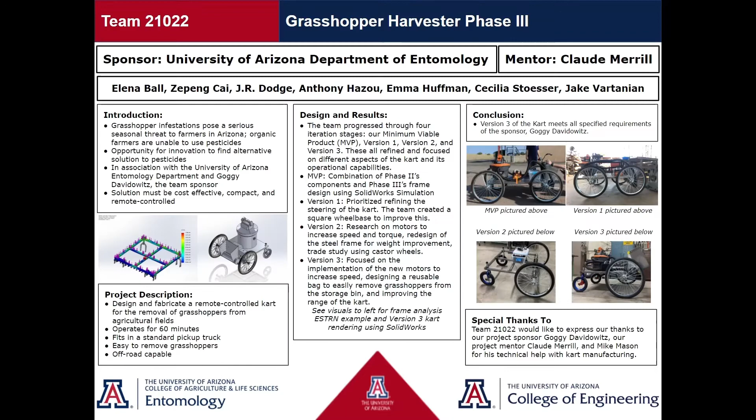Shown here is our Senior Design Day poster.

Farmers across Arizona are plagued by grasshopper infestations, which reduce yield and damage crops. Organic farmers are unable to use conventional pesticides, leading to an opportunity for innovation. The sponsor has requested a solution to remove grasshoppers from crop fields that is cost-efficient, remote-controlled, and relatively compact.

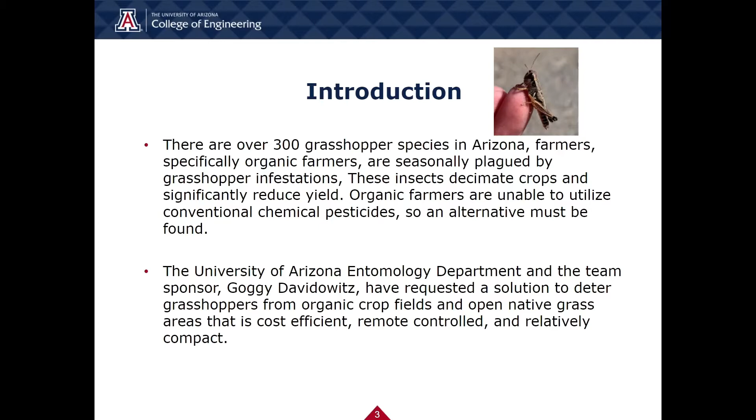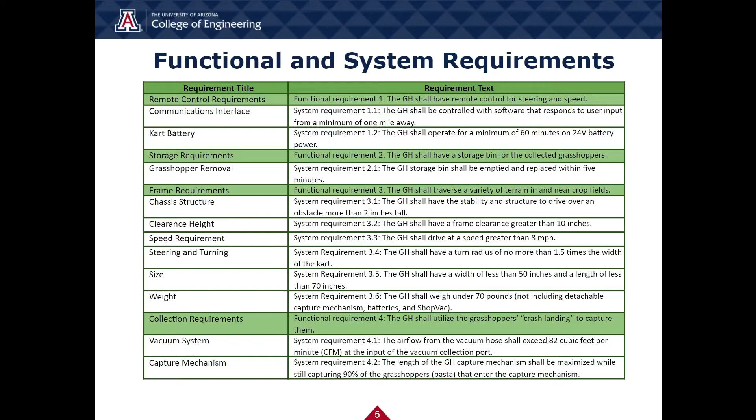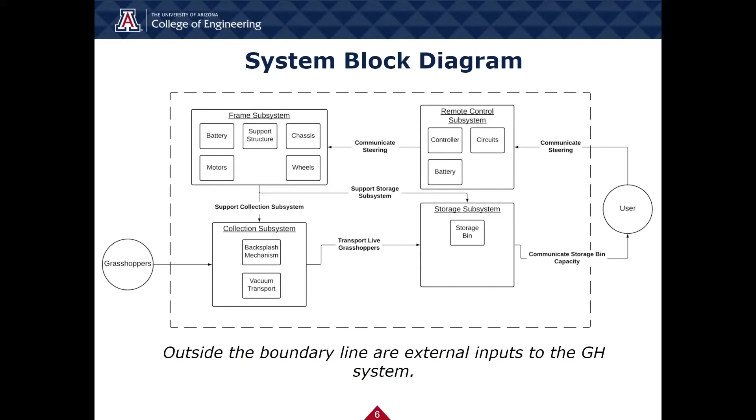The team follows Agile methodology, which includes sprints, for us defined as every 2 weeks. We meet together to discuss tasks that are achieved, not achieved, any impediments and improvements we can follow, and risks that have been incurred. The following tasks were prioritized by the sponsor's request.

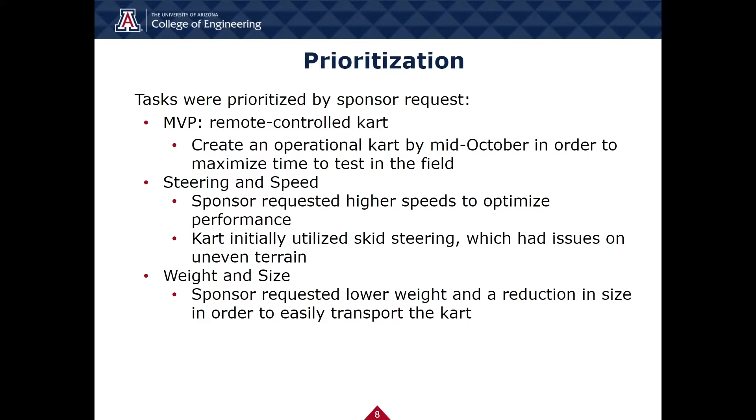First, an MVP, which was a remote-controlled kart that was delivered by mid-October. Second was steering and speed improvements. And third was a reduction in weight and size.

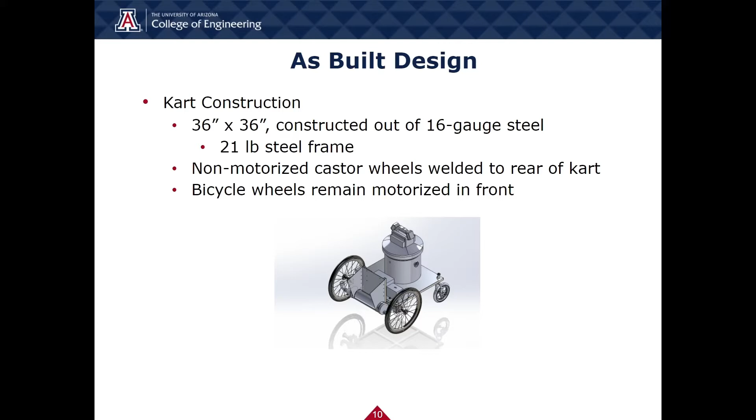The current design is a 36 by 36 inch frame constructed out of 16 gauge steel. The steel frame weighs approximately 21 pounds. There are 2 non-motorized caster wheels welded to the rear of the kart and 2 motorized bicycle wheels in the front of the cart. Shown here is the current cart design.

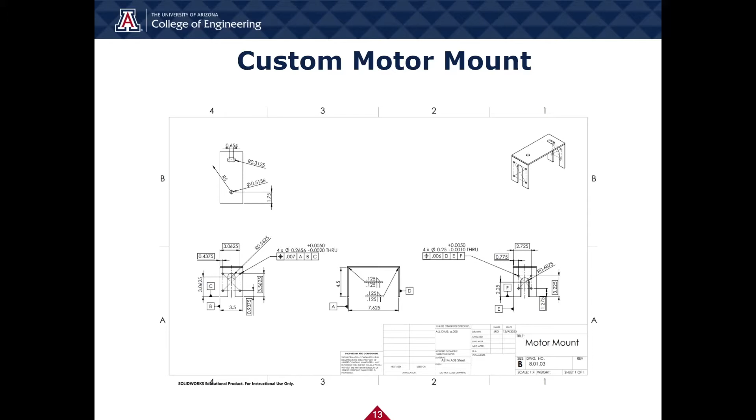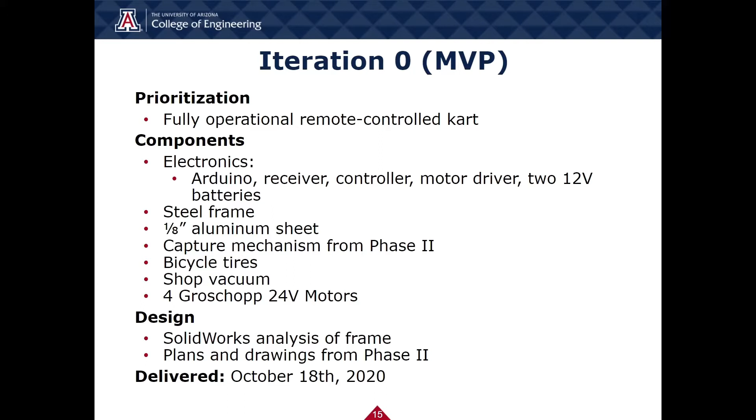The priority of Iteration 0, or MVP, was a fully operational remote-controlled kart. It was delivered on October 18th of 2020, and it utilized components from Phase 2, with the exception of newly purchased steel for the redesign of the frame.

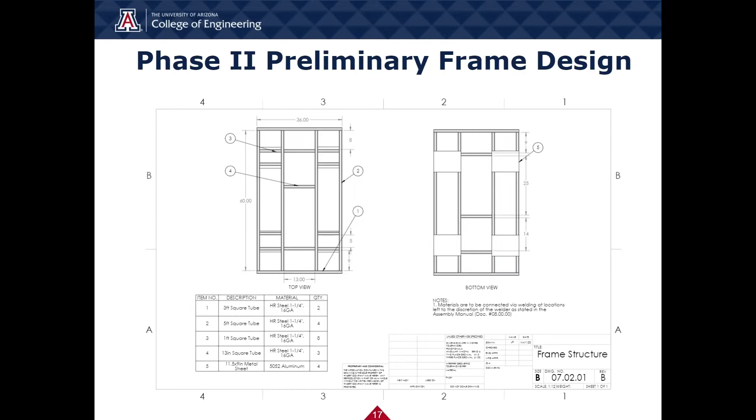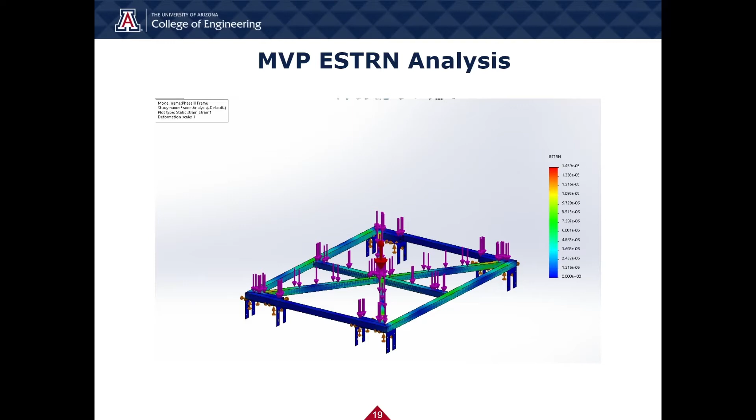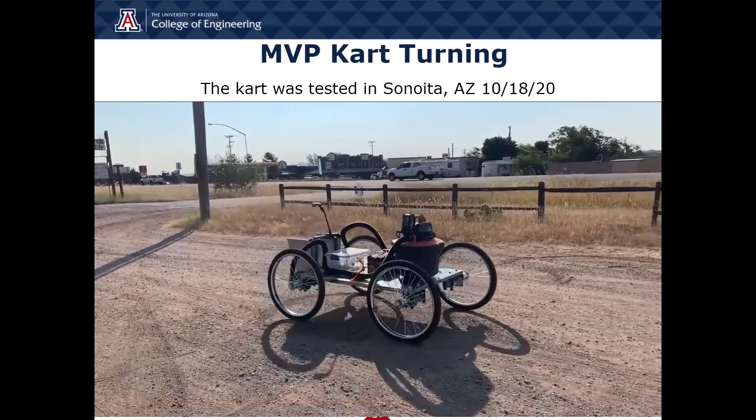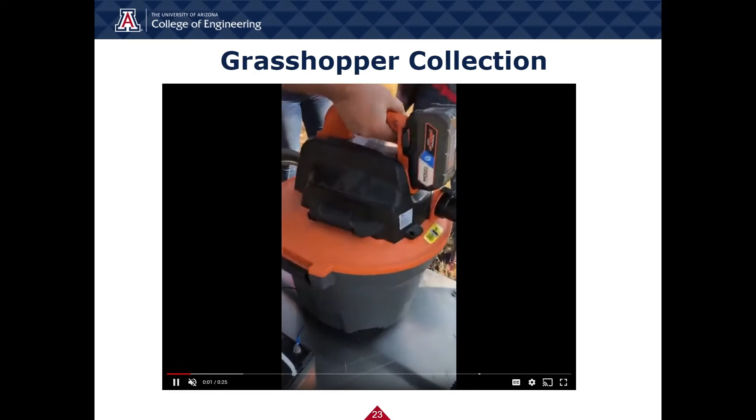Here you can see a slow motion video of grasshoppers escaping the shop vac during our test day in Sonoita, Arizona.

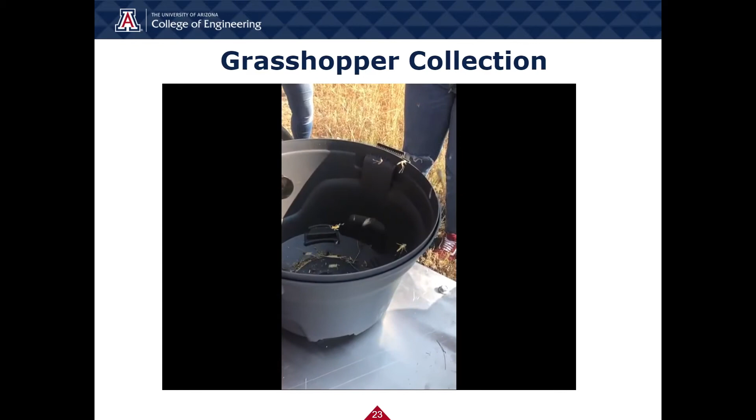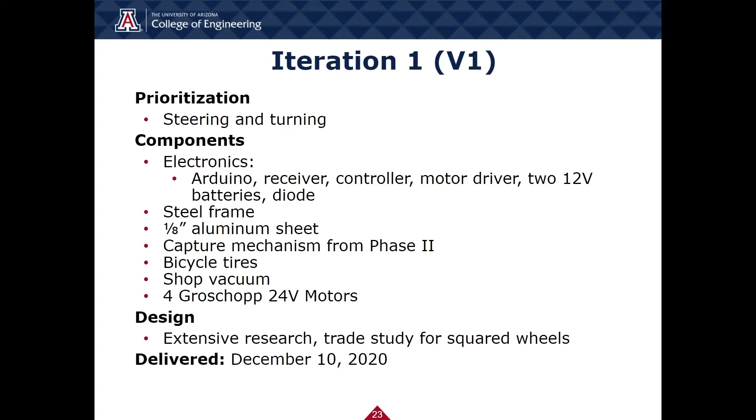The priority for Iteration 1, or Version 1, was to improve the steering and turning of the kart. The only new component from this iteration was the diode, discussed previously, and our design involved extensive research and a trade study for our squared wheels. This was delivered on December 10th, 2020.

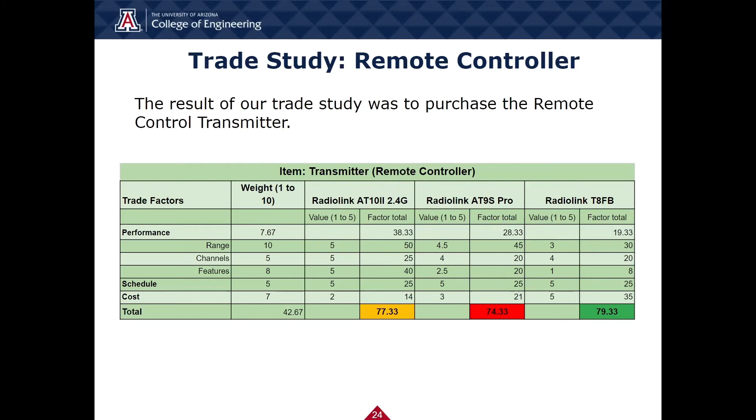This is the results of our trade study to purchase a new remote control transmitter. The previous remote control transmitter from Phase 2 did not meet the requirements of the sponsor.

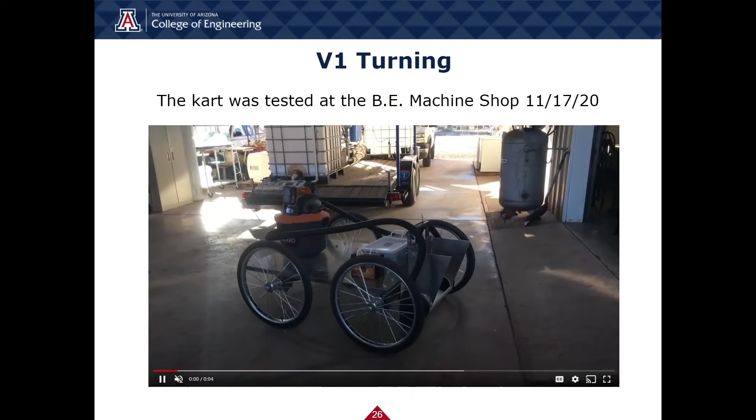Here is a profile view of the Version 1 cart seen with squared wheels on the MVP frame. This is a video of our Version 1 cart turning using optimized skid steering with the squared wheels on our rectangular MVP cart frame. The turning is massively improved.

The priorities for Iteration 2, or Version 2, were improving the steering and turning of the cart and decreasing its weight. New components for this iteration included the purchase of 16-gauge steel for a redesign of the frame to be fully squared, and new caster wheels mounted to the rear of the cart. We also performed motor research and a new motor purchase. This was delivered on March 16th, 2021.

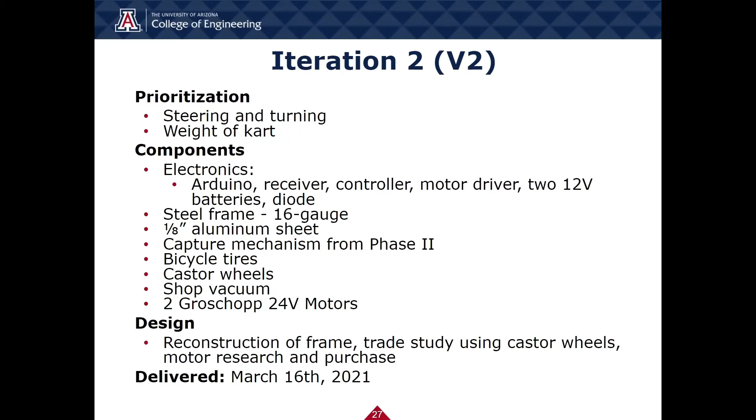During Iteration 2, the team performed a 2-versus-4 motor trade study and showed there was a significant improvement using 2 motors and caster wheels compared to 4 motors and bike wheels.

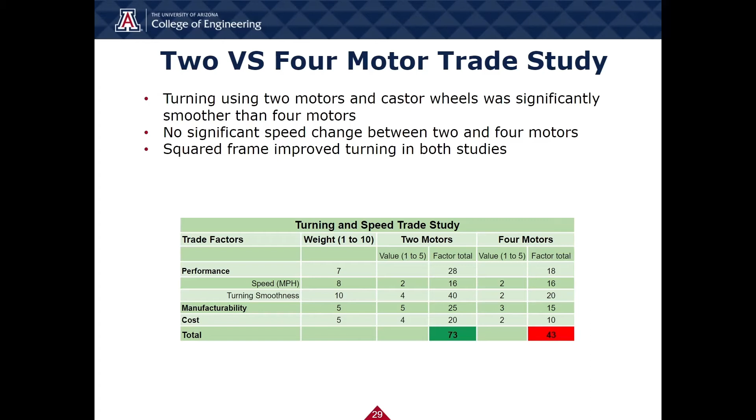During Iteration 2, the team also performed a trade study on new motors, resulting in the purchase of the Groschopp 55018 motors. This is a video of our Version 2 cart turning and driving utilizing caster wheels, demonstrating significant improvement in steering with no decrease in speed.

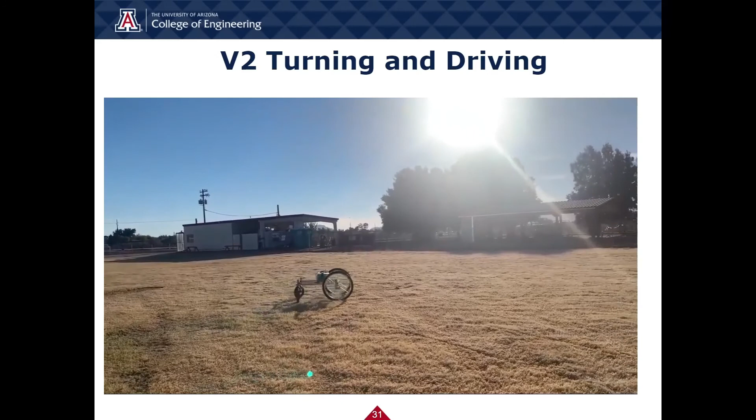The priority of Iteration 3, or Version 3, was to improve the steering and turning of the cart. New components include 2 new Groschopp motors. This iteration's design process focused on implementing the new motors and speed testing. This will be delivered on May 6th, 2021.

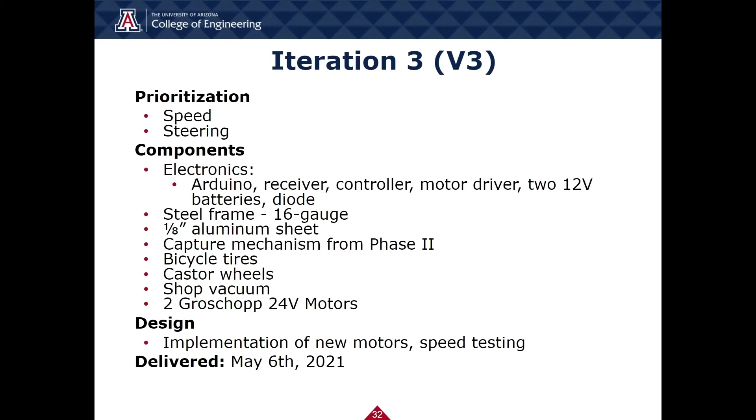Here's a video of our Version 3 cart turning and driving. We're still utilizing the caster wheels and in the process of validating speed due to some motor issues. The initial speed test run was about 6.4 miles per hour, over double our MVP speed.

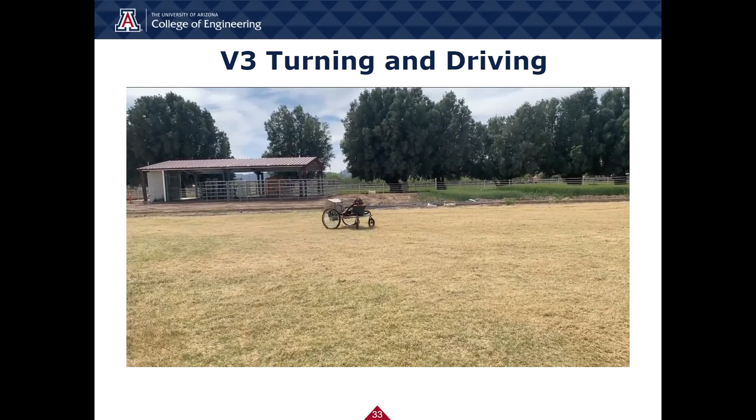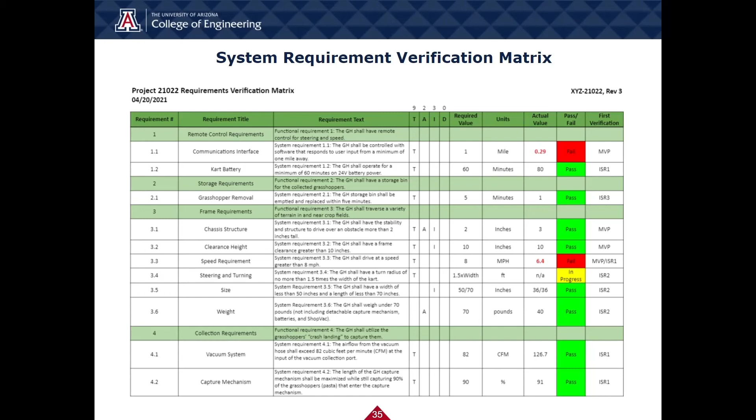The team learned lessons throughout each iteration, such as electronics failure, weight constraints, and speed optimization. These were solved through incorporating a diode, redesigning the steel frame, and implementing new motors to meet the sponsor's needs.

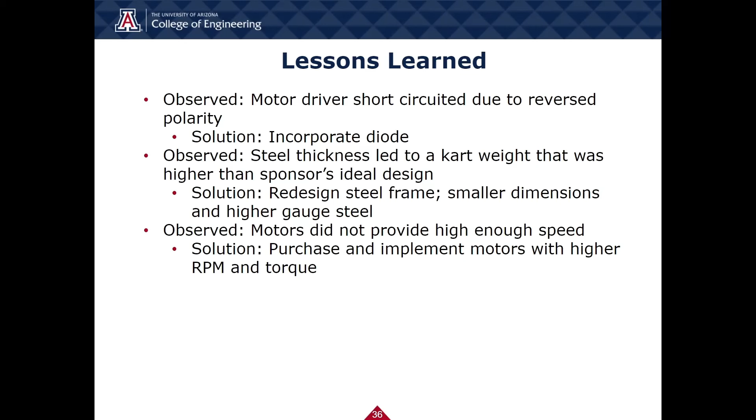The team will deliver the user manual as well as the Grasshopper Harvester and other documents to the sponsor by May 6, 2021. The Grasshopper Harvester will be delivered with the hardware necessary to effectively collect grasshoppers from both crop rows and native grass areas.

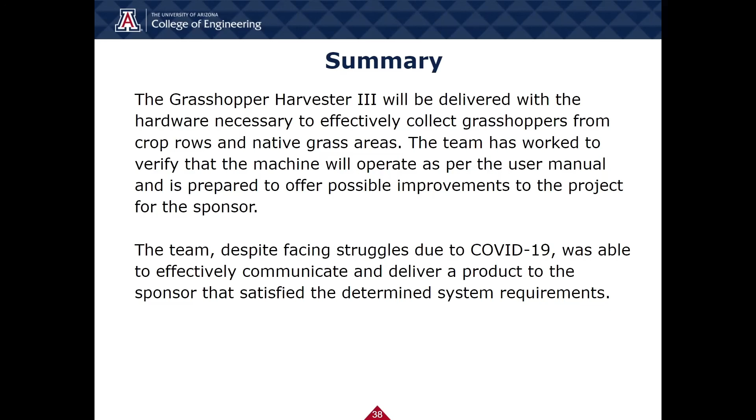The team has worked to verify that the machine will operate as per the user manual and is prepared to offer possible improvements to the project for the sponsor. The team, despite facing struggles due to COVID-19, was able to effectively communicate and deliver a product to the sponsor that satisfied the determined system requirements.